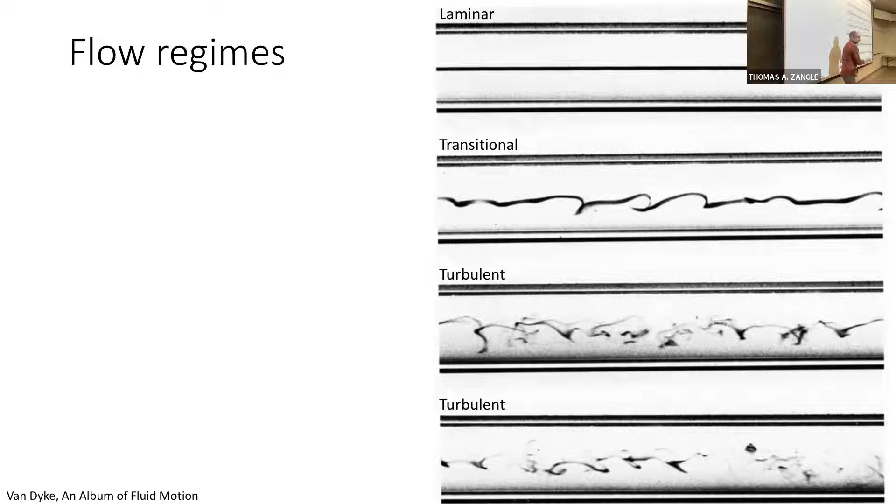This is probably the most important thing to keep in mind when we're understanding what's going on in pipe flow - this idea that what we see in laminar flow is very different from what we see in turbulent flow. This is going to be a key preoccupation of us in chapter 6: trying to develop tools that we can use to understand first what's going on in laminar flow, and then what's going on in turbulent flow.

So again, the most important thing to keep in mind is Reynolds number: rho u d over mu. We're going to see that in internal flow, we're generally going to define Reynolds number based on the diameter of the pipe. If we have a round pipe, or a square pipe, we'll get into what the definition of D is for a square pipe. But typically we're going to use diameter as a length scale, not the length of the pipe.

This Reynolds number is the most important thing to keep in mind, the most important thing to know. Said it before, say it again - you'll hear from me in the future as well. If you don't know the Reynolds number, you don't know much about the flow, right? You don't know whether you have laminar flow or turbulent flow, or if you're in this kind of messy transitional region in the middle.

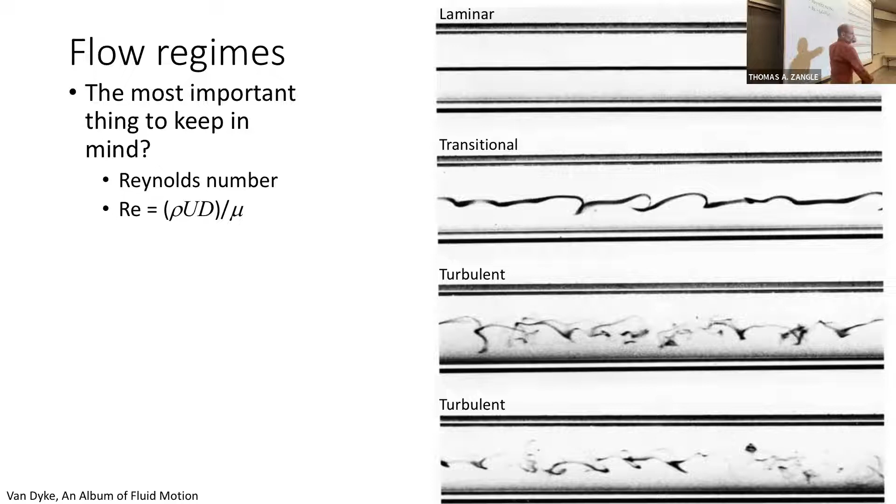So Reynolds number is what's going to tell us that. As we increase the Reynolds number - in this example, imagine we have the same experimental setup and we're increasing velocity - Reynolds number is increasing as we move from top to bottom here. And so the Reynolds number is what's going to tell us if we have laminar or turbulent flow.

So we'll talk about cutoffs and what happens at transition, although transition to turbulence is something that remains poorly understood and is an active area of research.

But some of the characteristics of laminar and turbulent flow: in laminar flow, we have layers or lamina of fluid that move past one another with no mixing. So this would be like flow out of a hose nozzle that's slow, and you've probably all seen this - if you take flow out of a faucet, or next time you turn on a faucet, look at this yourself. Turn on really slow flow, and you can see this nice smooth flow out of that faucet. That's laminar flow.

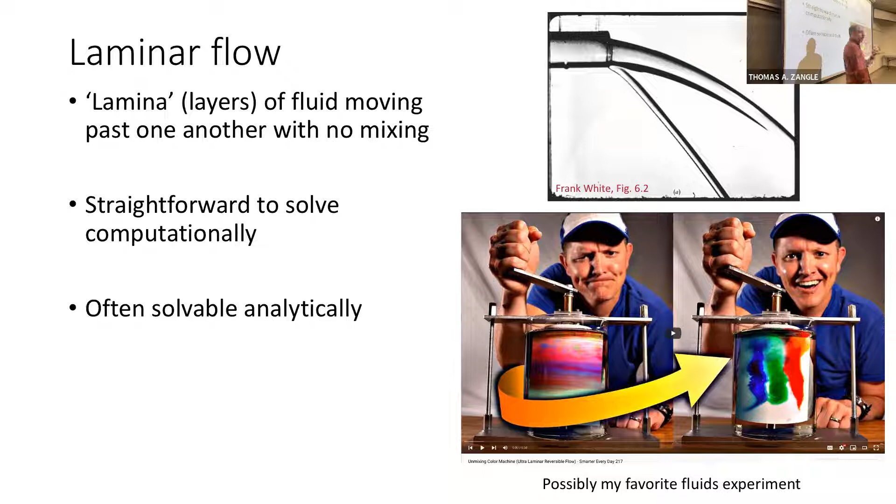To get back to laminar flow, it's generally fairly straightforward to solve computationally. Even if you have some complex geometry, we can generally solve it computationally fairly easily. We can often even solve it analytically. You've already looked at analytical solutions to laminar flow without knowing it, maybe within a pipe, or between two flat plates where we solve for the parabolic velocity profile—that's a velocity profile in laminar flow. So we can often solve for laminar flow velocity profiles analytically, and we'll be doing so primarily on Wednesday this week.

In contrast, in turbulent flow, the characteristic is that we have eddies across many different length scales, such that large eddies in the flow are transferring energy into smaller eddies, and smaller eddies still, until the smallest eddies within the flow are dissipating energy into viscosity, into viscous drag, into friction, into heat.

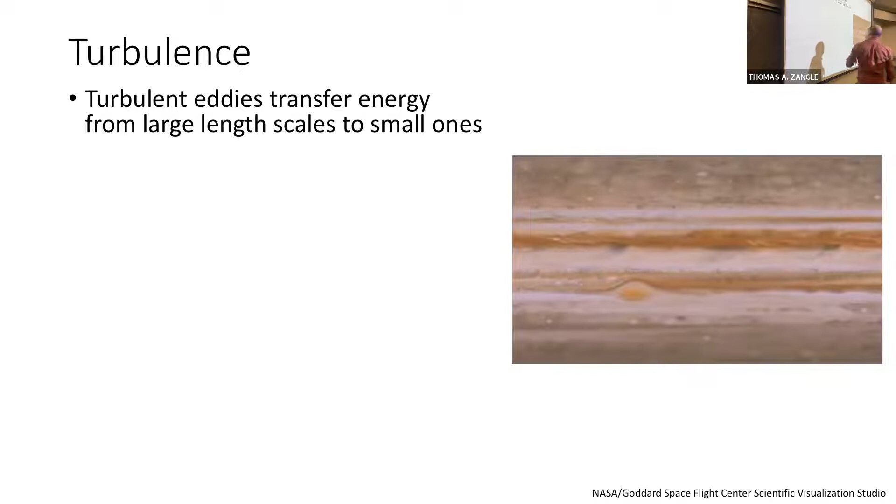The characteristic of turbulence is most famously described in this poem—a little bit of poetry to start your second half of the semester: 'Big whorls have little whorls which feed on their velocity, and little whorls have lesser whorls, and so on to viscosity.'

It's describing fundamentally what's going on within turbulent flow, which is that large vortices are creating slightly smaller vortices. Those smaller vortices create smaller vortices still, and this is called an energy cascade. This cascade of energy happens all the way down to the smallest little vortices that are then dissipated by viscosity into heat and friction. That is what characterizes turbulence, so this is definitely turbulence.

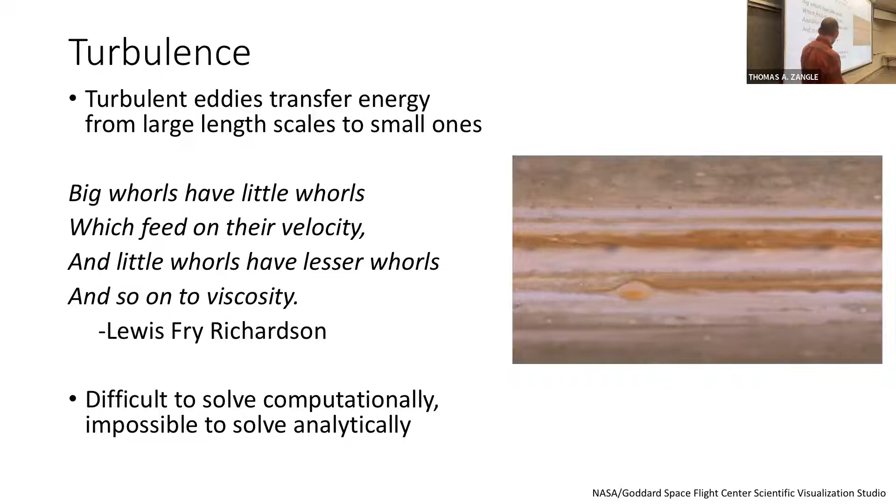We will deal a little bit with turbulence and start to approach the problem analytically, so you will see this. Turbulence in general can be very difficult to solve computationally, and it is currently impossible to solve analytically. So we do not have an analytical solution to turbulence. Part of this gets back to that Millennium Prize we talked about—there are certain potential mathematical singularities in the equations of motion describing turbulence. Even though we could describe turbulent flow, certainly with this kind of character, using the Navier-Stokes equations, we know the equations, but we do not have a closed form solution to turbulent flow.

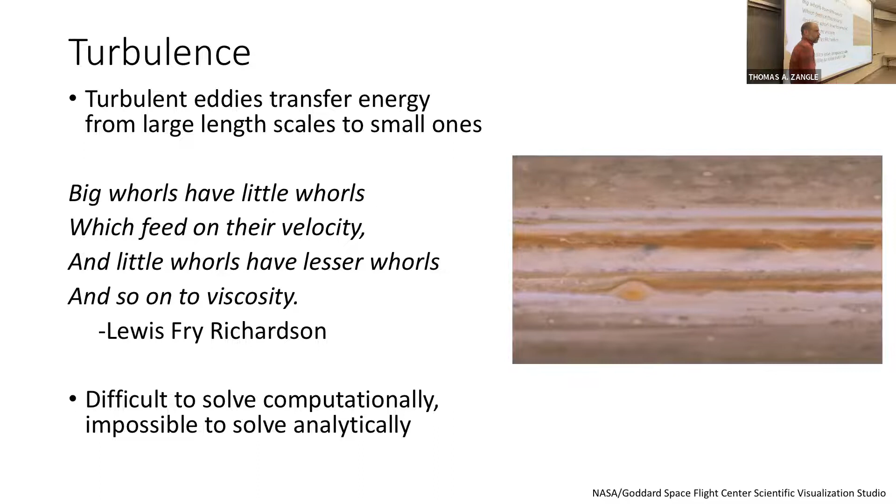So we're going to turn to empirical relationships to understand what's going on here. Just a note on the transition to turbulence—this is going to come up many times over the next month or two. One of the key things we need to keep in mind is why we need to understand what the Reynolds number is in a given flow, to know whether we have a laminar, transitional, or turbulent flow.

There are two key numbers you need to keep in mind for taking your Reynolds number and trying to figure out whether the flow is laminar or turbulent. For internal flow, the transitional Reynolds number is somewhere around 2000 to 2300. In practice, in a really, really good experiment, with a clean experimental setup and very low noise, a transitional Reynolds number from laminar to turbulent of up to 100,000 or so can be observed in a laboratory condition.

Under really noisy conditions, transition to turbulence can occur earlier. So if there are already a lot of fluctuations, or if you're shaking your experimental device around, then you can see transition earlier than 2000 or 2300. But in general, we'll use somewhere around 2300 as the transitional Reynolds number for the onset of turbulence.

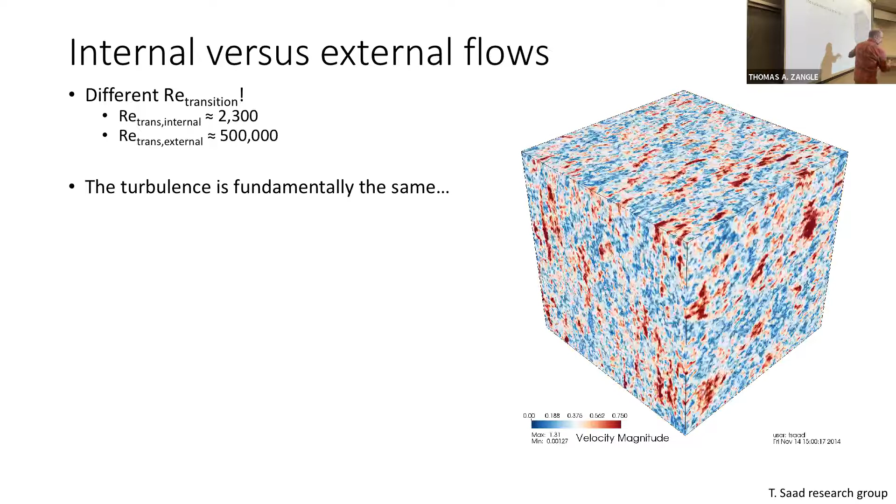A little point on this: turbulence in internal or external flow is fundamentally the same. It's described by the same equations - the Navier-Stokes equations. This is a little cube that was simulated computationally by Tony Saad's research group here at University of Utah - a cube of isotropic turbulence, where we're very deep within a turbulent flow, far enough away from the boundaries that there's no substantial gradients of velocity across it in any direction, but yet we have turbulent flow.

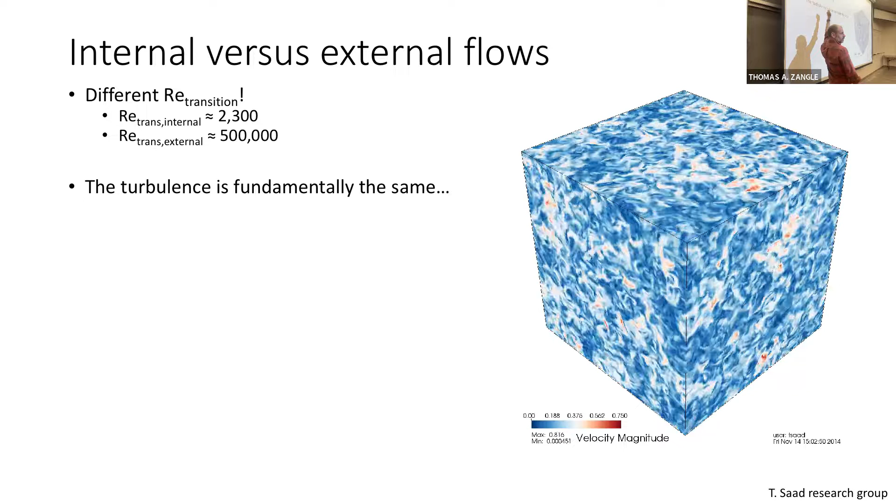This little cube could be someplace in an internal flow, or someplace in an external flow - it would describe the turbulence in either situation. So the turbulence is fundamentally the same. A lot of the things we develop in this chapter to talk about turbulence, we're going to use in the next chapter too. But one question is, why are the transitional Reynolds numbers different?

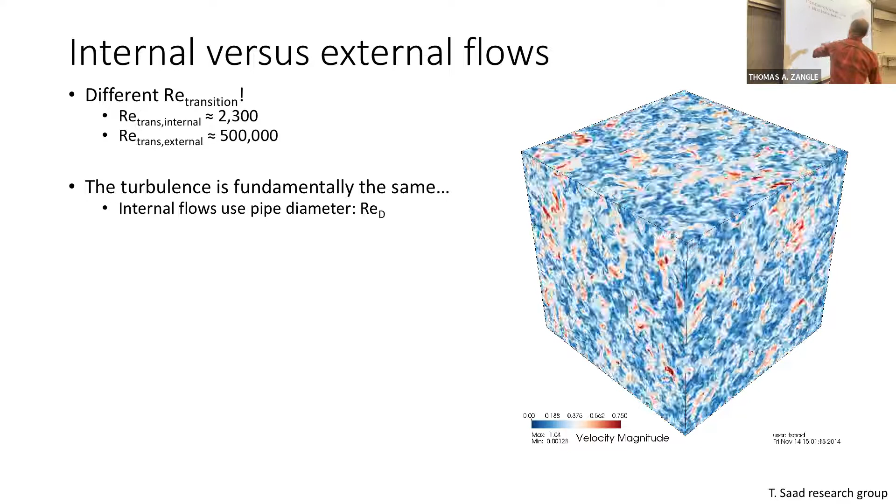One way to think of it is that internal flows use the pipe diameter in the definition of when transition occurs. So we often write the Reynolds number for internal flows as Re sub D, because the length scale we use is the pipe diameter. And the pipe diameter is transverse to the flow - perpendicular to it. So if I flow downstream, the pipe diameter is transverse to the flow.

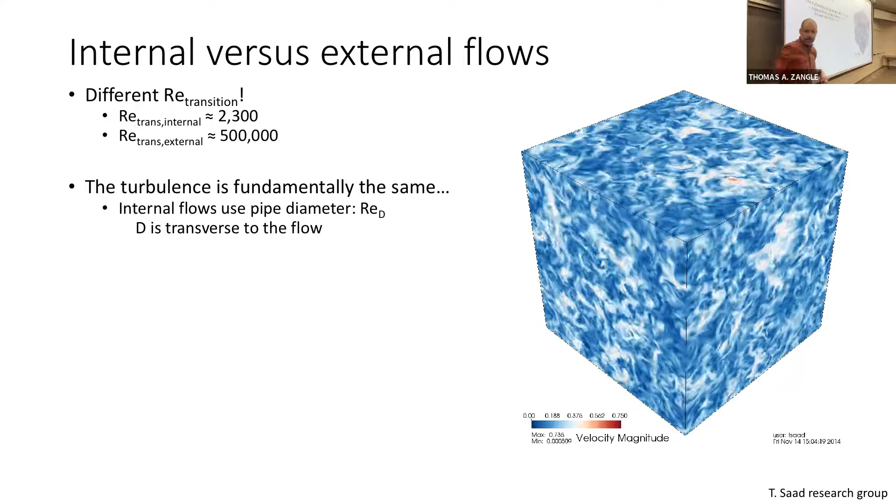In external flows, we typically use the object length. So if we have flow over an airfoil, an airplane wing, we'll use the length of the wing along the direction of the flow. We'll typically denote the Reynolds number in external flows, next chapter, as Re sub L, and this length is along the flow. So the length scales are in different directions relative to the flow, and we end up with a different transitional Reynolds number, essentially defining when we have laminar versus turbulent flow.

Internal flow means confined flow within a pipe or a duct - flow within an air conditioning duct, or flow within a pipe, that's internal flow. External flow would be flow around an airplane wing, flow around a wind turbine blade, flow around a car on the highway.

Good question. Yeah, other questions about this? Yeah.

A river, we tend to call its own thing - open channel flow - because when you're dealing with a river, you have the free surface at the top, and interesting but strange things can happen. Like if you reduce the width of a river, you'd think by mass conservation the depth would have to go up to preserve the same flow rate. But actually what generally happens is the elevation goes down - the height of the river goes down, because when you reduce it, the flow speeds up and therefore needs less area to move through. So you get all kinds of counterintuitive things.

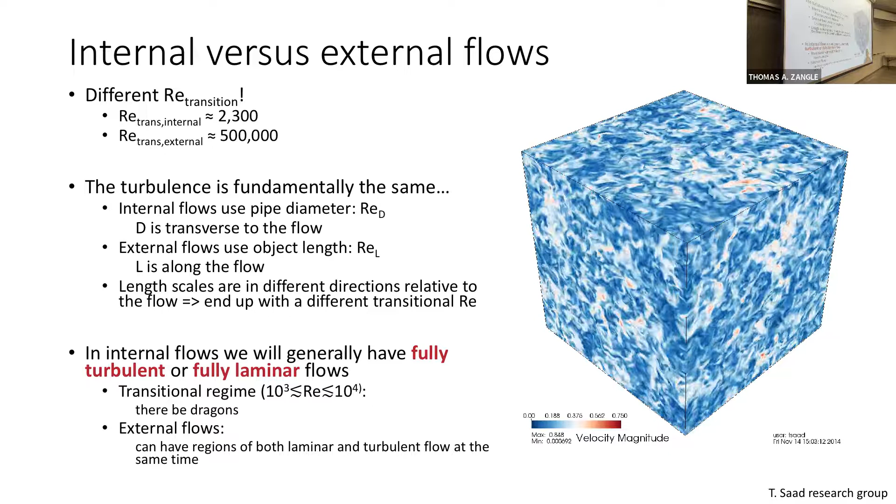If there were one Reynolds number where we always see transition from laminar to turbulent flow, then it wouldn't be that hard of a problem. We could just define it experimentally, define what happens experimentally, and then just follow that curve. Doesn't matter the shape of the curve. If we know the curve, we're fine. But part of the problem is not only does the curve become a weird shape, but we don't know exactly where it's going to happen.

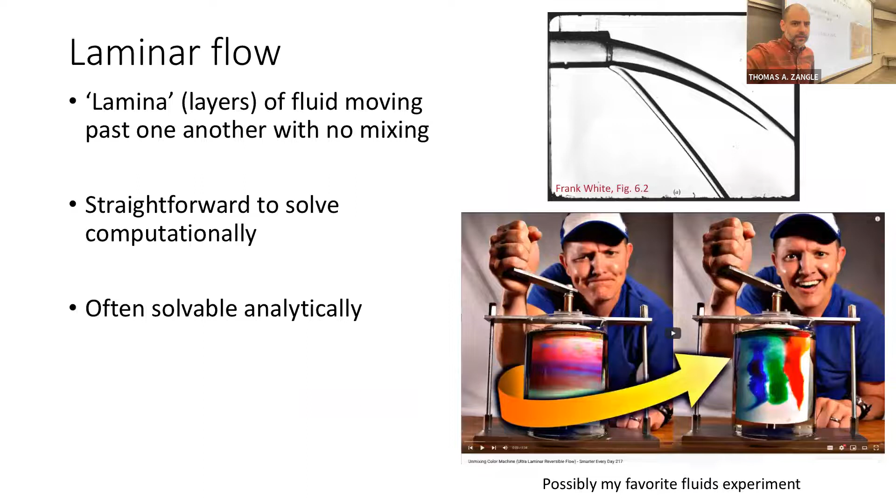A famous example, I showed some images of this experiment of putting dye in a pipe and watching the flow of the dye to try to figure out where the transition is from laminar to turbulent flow. Most of the time when you run this, you get a number for transition to turbulence of somewhere around 2,000, 2,300, something like that. Reynolds, of Reynolds number fame, famously ran and reported on this experiment, possibly first. He's the one whose name is on the number. He very famously ran this experiment.

And he was able to get transition to turbulence up to something like 12,000, Reynolds number of 12,000. But his experimental apparatus still exists, right? This is over 130 years ago. The experimental apparatus still exists at his lab in England. And if you go there now and try to run the same experiment on the same apparatus, you get a transitional Reynolds number closer to 2,000.

Partly because maybe there's more roughness on the inside of pipes now, so there's more disturbance caused by that. There's also a lot more traffic now than there was 130 years ago—bigger trucks outside causing vibrations in the fluid that create disturbances that cause transition to turbulence sooner. So when I say there be dragons, I mean it is a confusing place, somewhere that can confound your best efforts as an engineer to try to control.

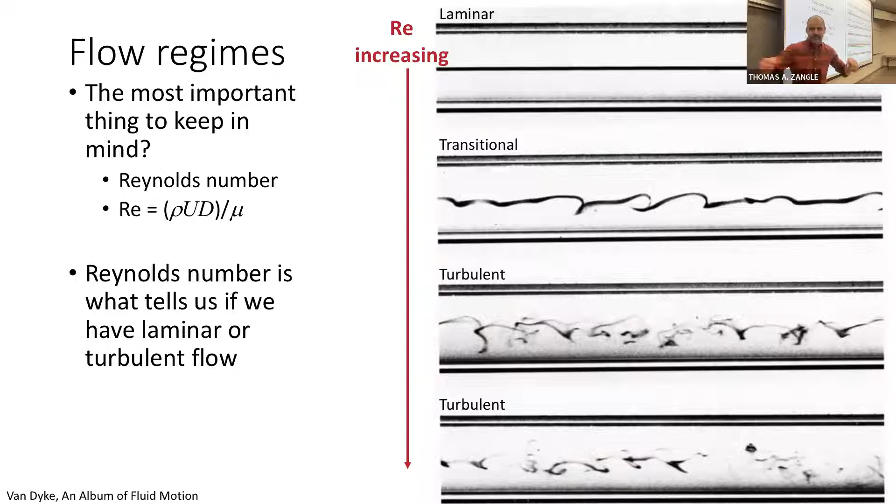So, I guess another thing we're going to see here, maybe to this point in your engineering careers, you're used to one answer, each problem has one answer, a number, and we say what that number is. We're going to see that for some of the important correlations we'll use here, we'll do problems, and our answers are only going to be good to about 10 or 15%.

I kind of harp on significant digits a little bit. I know many of your engineering professors do, but it's especially important when we're talking about these flow problems where your answer is only so good. We're going to look at some different correlations, different curve fits, for example for turbulent flow, that's the turbulent flow regime where we have some idea or some hope of coming up with an answer.

We're going to have answers that are only good to within about 10 or 15%. So if you give me an answer to one of those problems to, you know, 10 significant digits, because that's what your calculator gave you, it's wrong in a very fundamental sense. Even if you have a number that's in the right ballpark, expressing it with such high confidence is wrong in a very real way.

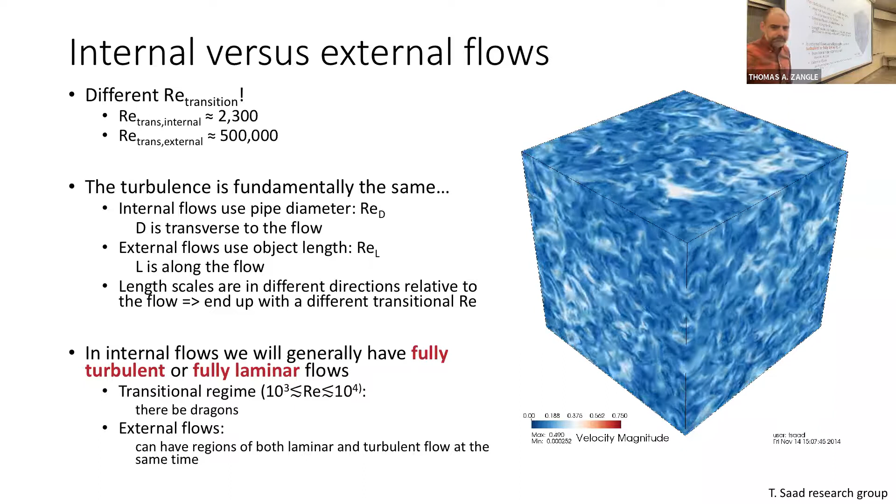So yes, this is uncertainty. This is massive uncertainty, but this is reality. This is what physics gave us, and this is what we as engineers have to deal with. And we will see a similarly broad transitional regime in external flow as well.

There's an important concept, which is that of fully developed pipe flow. So if we consider, let's say we have a giant tank out here on this side, and we have a pipe connected to that tank, and we now have flow into that pipe. You can imagine, let's say it's water, as that water is flowing into this pipe, the velocity profile of the water is going to be changing as we move downstream.

So let's say we end up with laminar flow, we'll see that we have a parabolic velocity profile at some point downstream. But that parabolic velocity profile doesn't just jump into existence at the beginning of the pipe. It takes some time to, we would say, develop, to go from what would look like probably pretty uniform flow at the entrance to this parabolic flow further downstream.

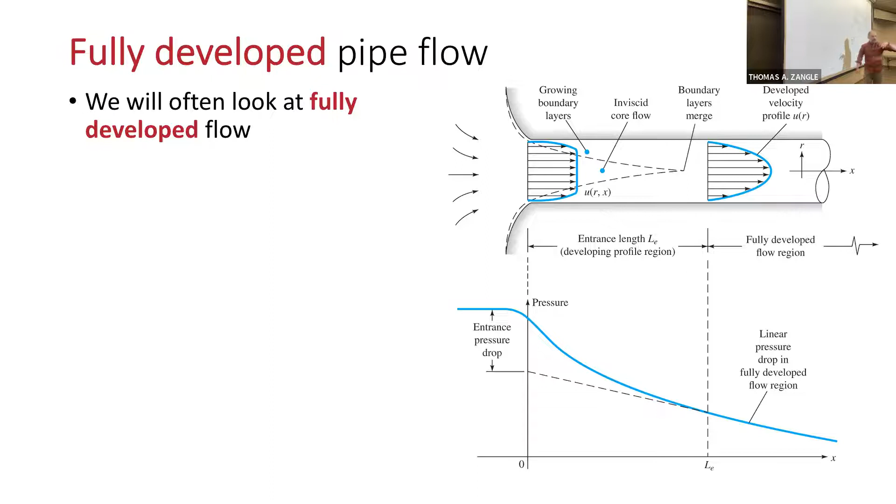We will often, when we're solving problems, only consider the case of fully developed, but let's just talk about why that is.

In this entrance region, what's happening is that basically the influence of the walls, the viscous influence of the walls, the drag that the walls exert on the flow, is kind of creeping outwards into the flow as we move downstream. And so the viscous influence, the region of viscous influence, grows with distance into the pipe. That's what's shown by these dashed lines here, the region of the pipe flow that's been affected by the wall, by the drag from the wall.

When we say we're fully developed, we mean that the flow velocity profile is constant with distance into the pipe. Through this region here, we have the velocity profile, the viscous influence is growing, the influence of the wall is growing into the center, towards the center of the pipe, and the velocity profile is changing from fully uniform to parabolic downstream. So this is the developing region. But when we're in the fully developed region, the velocity profile is now constant down the pipe and stops changing.

So once we get to here, if we make this pipe a mile long and we look at the velocity profile a mile down the pipe, we should see the same velocity profile that we had here, once we're in that fully developed region.

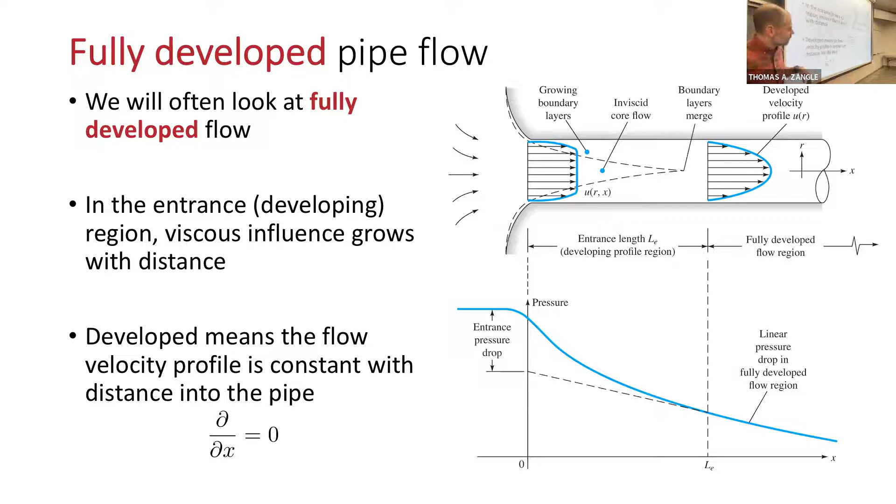In this developed region, we have d/dx equal to 0. We can understand something here. Without getting into the full solution, we can learn something about development of flow using dimensional analysis. This is going to be a tool we'll use quite a bit in setting up the concepts in this chapter.

Because it lets us say something real about the problem without getting into all the physics. So if we want to know what this entrance length is, we can say that entrance length, in general, is a function of the pipe diameter, the velocity of the flow, density, and viscosity.

So how many dimensionless groups should describe this problem? How many variables do I have? Five. How many dimensions are there here? Mass, length, time are going to be described. So we have 5 variables and 3 dimensions.

How many dimensionless numbers do I have? Two. So we're going to have 2 dimensionless variables describing this. Can anyone tell me one of those? Reynolds number. We could set one of our secondary variables as rho or something, and we would end up with Reynolds number coming out.

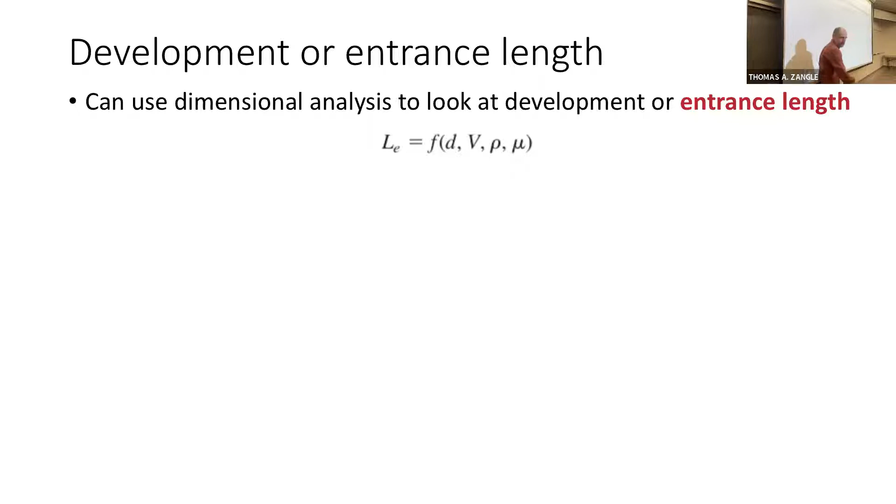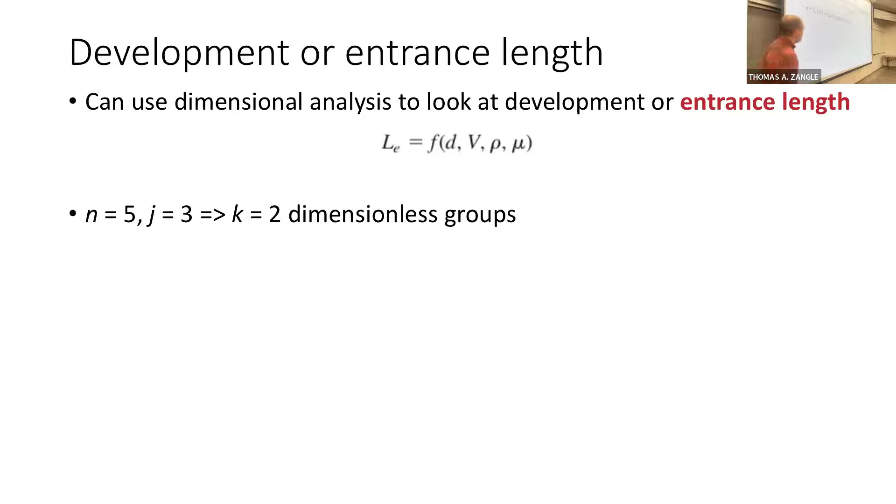Does anyone know what the other one is going to be? I guess some of you have slides in front of you, but what would the other one be? L over D, yeah, would be a great one. So two dimensionless groups, and these are typically L over D and Reynolds number.

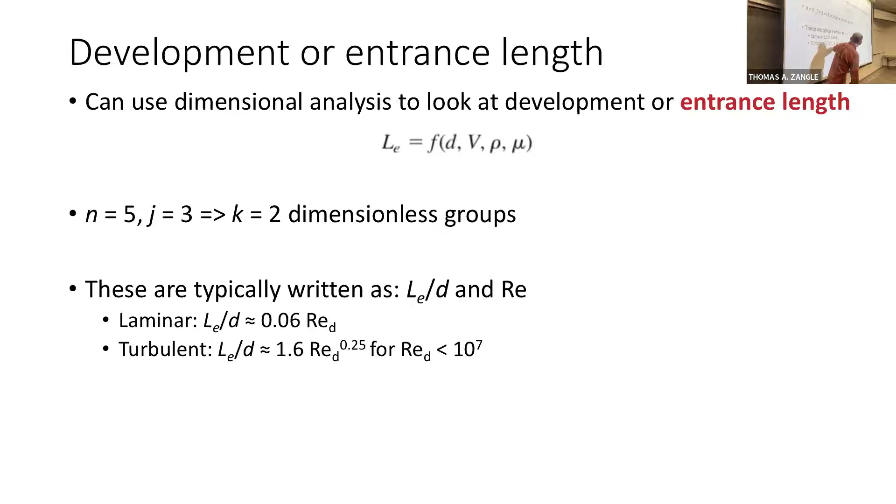For laminar flow, L over D, the entrance length over the pipe diameter, is generally about 0.06 times the Reynolds number. In turbulent flow, L over D is generally about 1.6 times Reynolds number to the 0.25 power, where Reynolds number is less than 10 to the 7th. This means L over D is typically less than about 100, often much less than that.

So for a 2-inch diameter pipe, our entrance effects are only within the first 16 feet, often a smaller distance than this. So we're generally going to ignore the entrance length effects within our problems. In practice we can often ignore them, though in some cases they will be important, and we're going to lump them into something called a minor loss later in chapter 6. We'll come up with an engineering approximation to include these effects, but we'll discuss that later in the chapter.

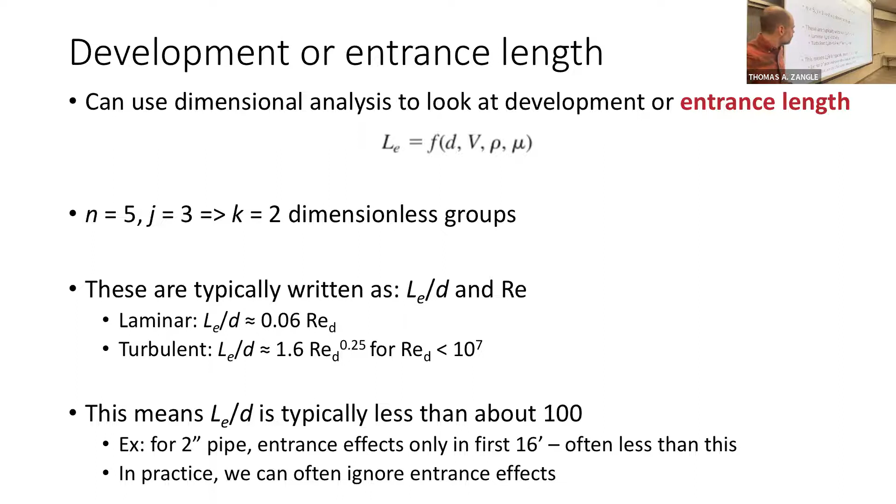We're generally going to consider fully developed flow, and the approach we're going to use in this chapter is an energy balance. When we have steady flow in a pipe, we can apply an energy balance: what comes in is equal to what goes out. On the inlet we have our ability to do pressure work, kinetic energy, and potential energy, the same on the outflow. Frictional losses are an output. A pump is an input, so we get a negative sign on that side. And if we have a turbine that we're turning with the flow, that's an energy output as well.

Need a grounding strap or something.

So we're going to start with pipes. We'll consider pumps, and we'll have problems where we try to find the energy input or the power input of pumps. But to start with, we're going to ignore pumps and turbines and just talk about pipes themselves.

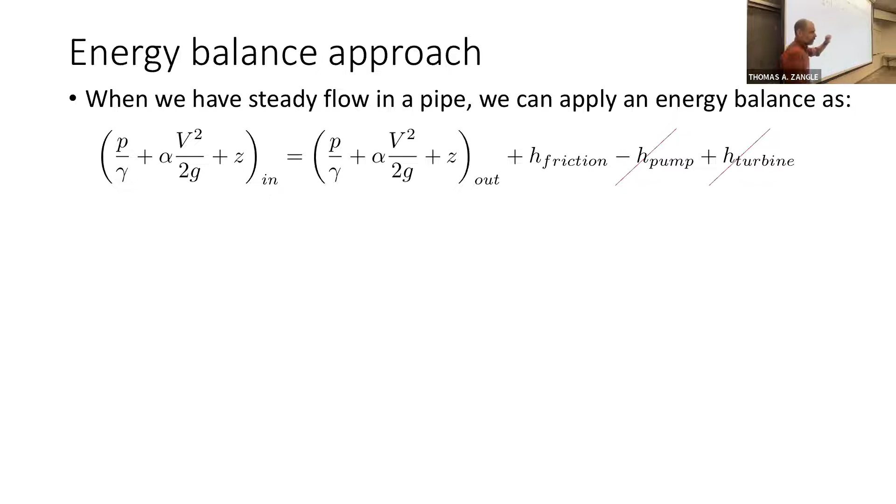So we're just going to have flow energy in is equal to flow energy out plus H friction, or loss due to friction. Note that this is almost the Bernoulli equation. If we didn't have this frictional term, we'd just have Bernoulli. But this frictional term is actually going to be most of your problem solving in chapter 6, defining what this frictional term is. You cannot leave this out, okay?

So it's really an energy balance. Sometimes you'll see this expression called an engineering Bernoulli or a modified Bernoulli equation, but it is not strictly the Bernoulli equation. It's the Bernoulli equation plus this term, or more properly, an energy balance.

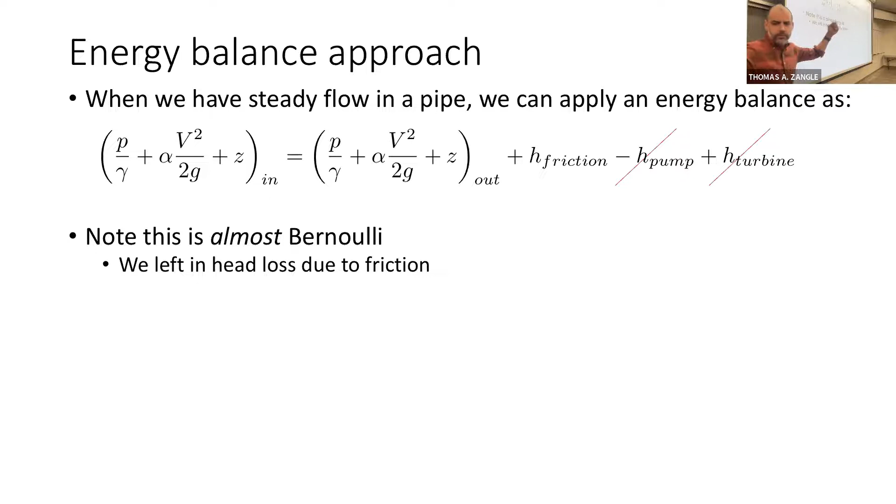The alpha term, can anyone explain what it is again? Correction factor, yep exactly. So it's because in general, in pipe flow, we have non-uniform velocity profiles, and so we have that correction factor. We're going to see it actually drop out, but we'll get there in a second. So it's almost Bernoulli, but we left in the head loss due to friction, and we need to account for this correction factor in general in this expression.

But in fully developed flow, V in is V out. If we have a pipe that is not changing in area, and that's often going to be the case we consider, by mass conservation, the velocity in is equal to the velocity out. Average velocity in is the average velocity out. And if the velocity profile is not changing, then everything about that inflow velocity profile is the same as the outflow velocity profile, and so these terms actually drop out.

And so what we end up with, in a rearranged form, is the head loss due to friction is Z1 minus Z2 plus P1 over rho G minus P2 over rho G. So velocity dropped out, or these velocities dropped out.

Now the question is, what is this HF? And this is again the question of chapter 6: what is HF? We're going to be talking about this throughout the chapter.

Just before we move on, this Z plus P over rho G, if this is dimensionally consistent, what are the dimensions of P over rho G? It has to be length. If this is dimensionally consistent, and I hope I haven't made that mistake, then this P over rho G has to have the same dimensions as Z, and Z is just height. So this has dimensions of length. This thing is sometimes called the hydraulic grade line, or HGL.

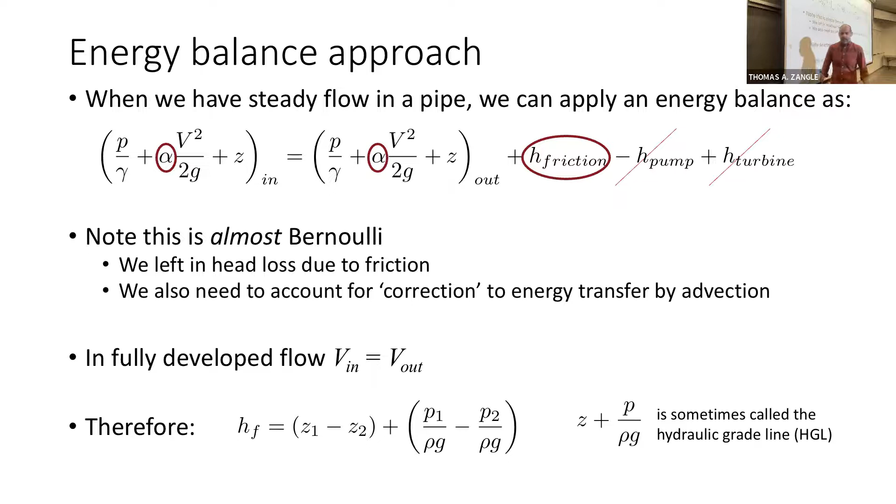So in your textbook, it looks at the question of how do we define what this HF thing is. And if you actually use a momentum balance approach, again chapter 3, you can derive an expression for HF as 4 times the length times tau wall, the shear stress at the wall, the shear force basically being applied by the wall on the fluid, that's tau wall, over rho GD.

So now the question is, what's tau wall? We know tau wall, we know HF. But the problem is that we don't always know what tau wall is. We'll see in the laminar case we can solve for this directly, but in the turbulent case, we're not going to be able to solve for tau wall directly, so we're going to have to use empirical relationships.

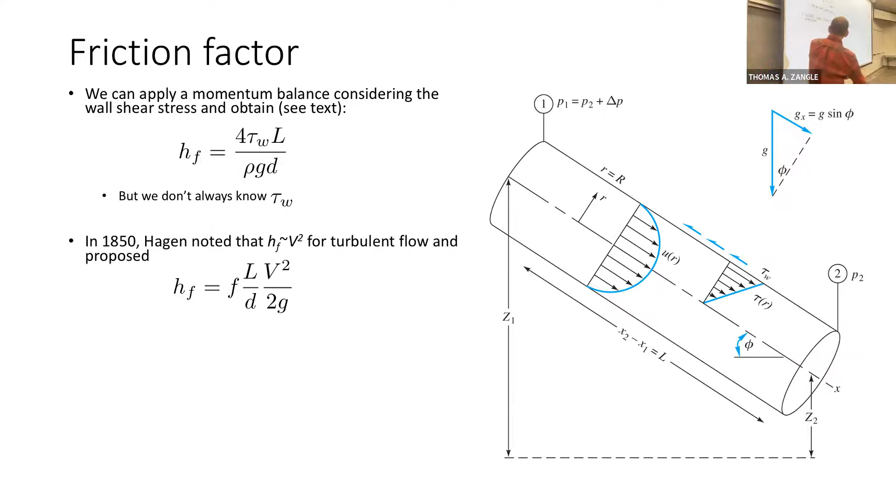And so recognizing this problem in 1850, Hagen noted that HF goes as about V squared when you're looking at turbulent flow. The head loss due to friction within a pipe increases with about the square of velocity.

And so he proposed this following relationship, which we're going to use quite a bit for the head loss due to friction. Friction factor F times L over D times V squared over 2G. I should have boxed this and put it in red and bold, but we're going to be using this over and over and over again in chapter 6.

Remember from last slide, we said that most of chapter 6 is going to be about defining HF. Well, now we've kicked the can a little bit further down the road, and now we're saying we need to figure out what F is, what this little friction factor F is. Most of our problem solving is going to concern that.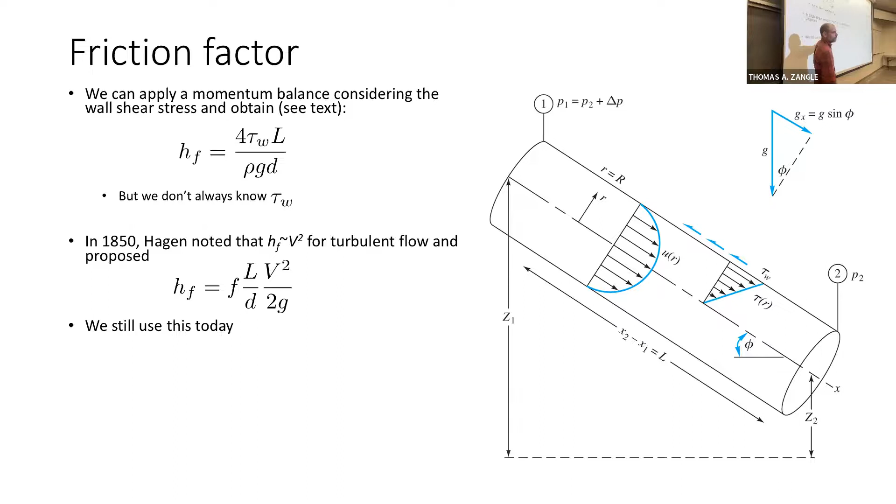This V is V average. And this D is diameter, and L is the length of the pipe. So longer pipe, bigger frictional loss. Higher velocity, bigger frictional loss. Smaller pipe, bigger frictional loss. So we still use this today.

We will be using this in class. In this definition, so this is something to be careful of. In this definition, which your textbook uses, this F is called the Darcy friction factor.

But something you need to be aware of is that sometimes the fanning friction factor is used instead, within a chemical engineering context. Sometimes you'll see friction factors that are the fanning friction factor instead. And you can convert between the two: the Darcy friction factor is just 4 times the fanning friction factor.

So your textbook does everything in terms of this Darcy friction factor. But just be aware, if you see an F quoted someplace, you need to understand, is it Darcy or fanning? Again, in your textbook, it's going to be Darcy, but that is not always the case. So there's this weird convention between the two.

Okay. Yeah, there's something definitely to be aware of. Okay. Yes.

This is HF. HF goes as V squared. So HF scales as V squared. HF increases as velocity squared. That's what that means.

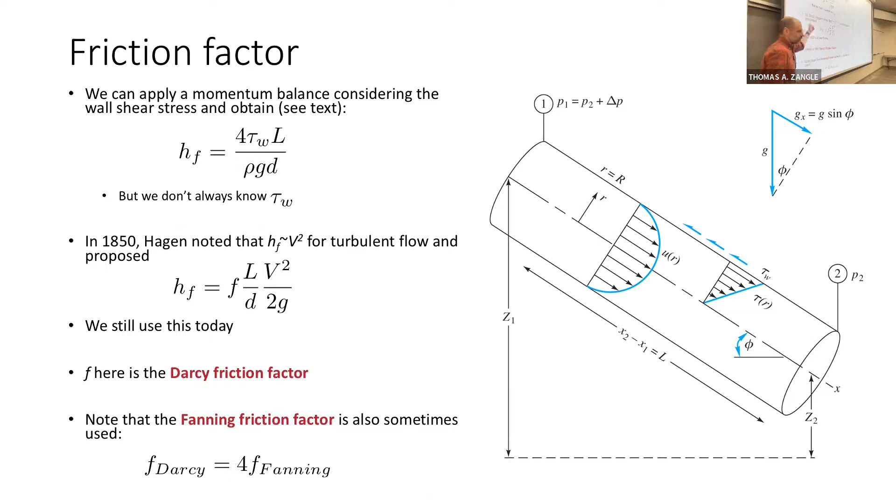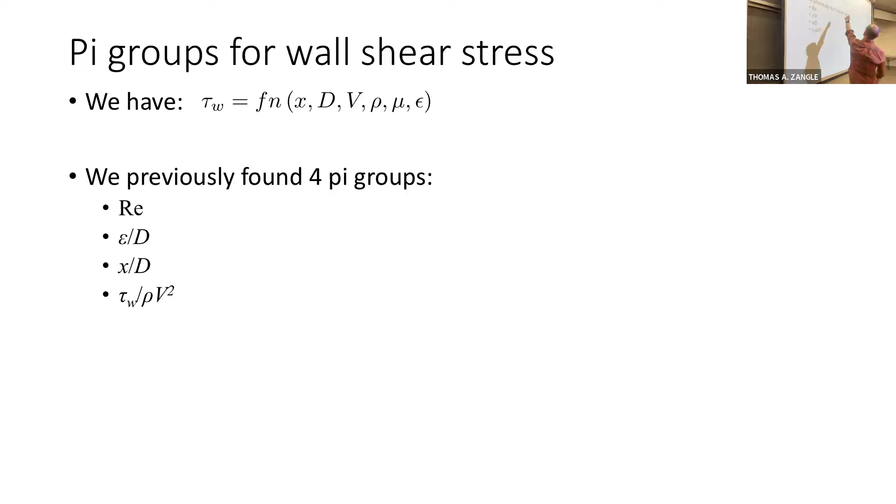We'll start out by defining the problem in terms of tau wall. We'll say that tau wall in general is a function - this is an example that we did in chapter 5. We said that the shear stress at the wall is a function of distance down the pipe, pipe diameter, velocity, density, viscosity, and epsilon, which is the roughness of the wall. And we get that dependence from experiments, right? For example, starting with Hagen and even before, we know that those are the things this problem depends on.

In chapter 5, we found 4 pi groups for this problem. Here we're going to simplify a little bit, noting that for the case of fully developed flow, this X variable drops out, so we lose a pi group, and we just have 3 pi groups left: Reynolds number, epsilon over D, and tau wall over rho V squared.

We also know that HF is equal to this. Hagen defined the friction factor F. This expression here is basically a definition of what friction factor is. Hagen defines friction factor in this expression here. And so we can now relate tau wall to F, our friction factor.

Can someone explain why the 3rd pi group drops out? Francisco? Because we're considering fully developed flow, right? So if we consider fully developed flow, then this problem is no longer a function of X, right? Or ddx is equal to 0, right? And so we can drop out this pi group. Good question.

Okay, so we can write this expression for HF. So F is 8 tau wall over rho V squared. So the dimensions - F is dimensionless. Our friction factor F is dimensionless. Something we learned here. So the last pi group is generally just written as F.

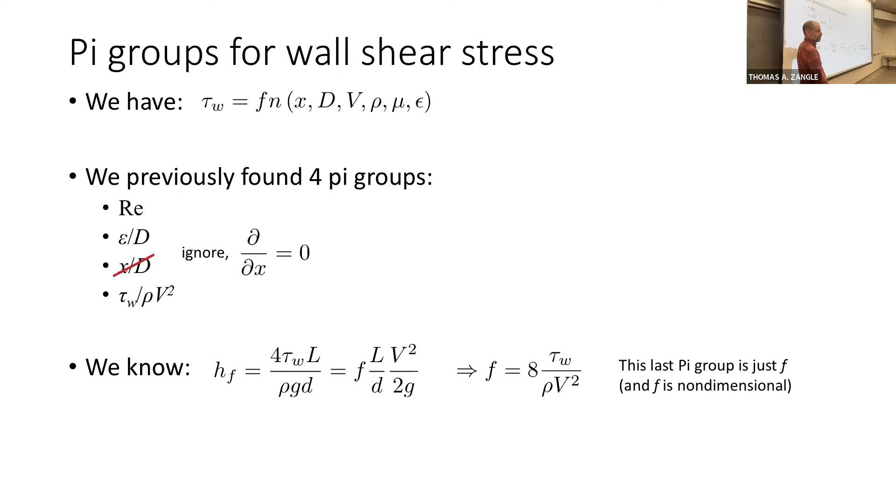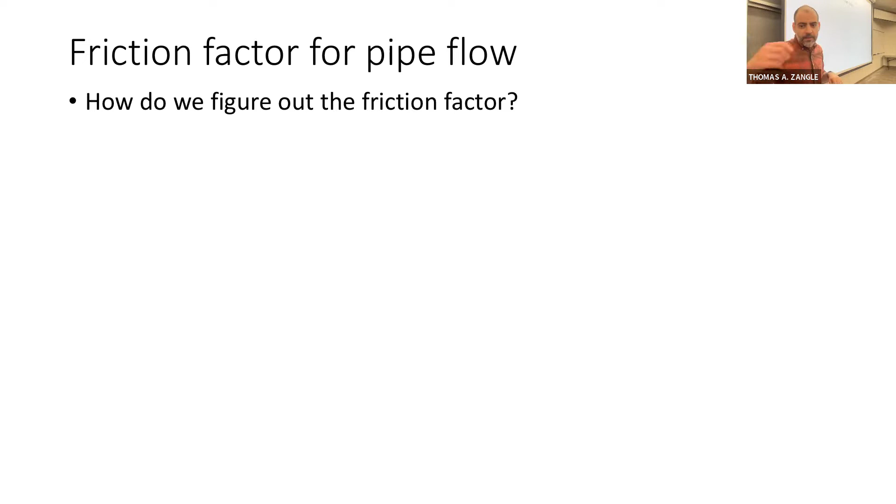So now the question is, how do we figure out the friction factor? And we're going to see that we can solve for that friction factor F analytically using laminar flow, and that's going to be Wednesday's class. And for turbulent flow, we're going to have to do this experimentally.